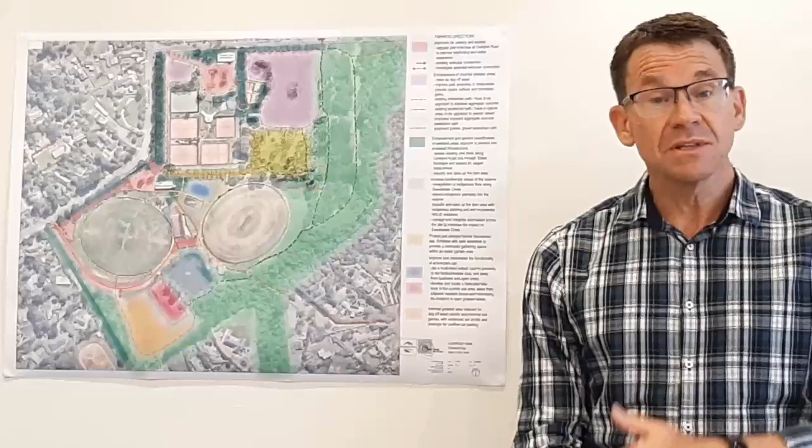The thematic directions respond to the existing conditions of the reserve and to the aspirations of the users and the community as to how they'd like to see the park in the future, what they value about the park now, and what they might like to see changed.

I'll briefly outline the thematic directions included on this plan to help you make comments on the plan on Council's website. One of the key issues at Overport Park is parking and access, particularly on busy sports days and around the main sports ovals.

The recent road and car parking works undertaken by the City of Frankston will go a long way to resolving those issues and easing car parking problems. One of the directions of the master plan will be to investigate improved access and parking along Overport Road around Oval number 1.

There's a couple of existing car parks here, and one of the directions is to investigate the potential to enlarge those car parks and to provide some connection between them to make better use of those car parks and to make circulation around the oval clearer for people.

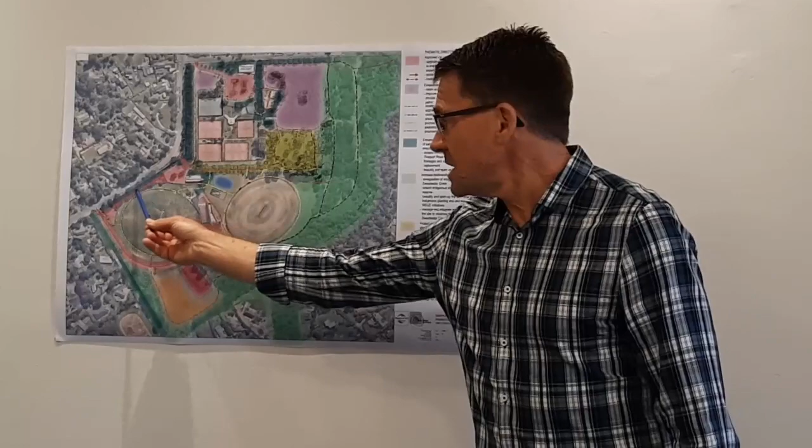That will involve some investigation into the existing pine trees along Overport Road, into their health, condition, and longevity into the future. One of the directions will be to investigate replacement of those trees with other trees that will enable improved parking and connection between those car parks.

Signage on Overport Road will also be important to direct people to the relevant car park they're coming to, depending upon what activity they're visiting at the reserve. These will be important aspects in terms of improving parking and accessibility into the reserve.

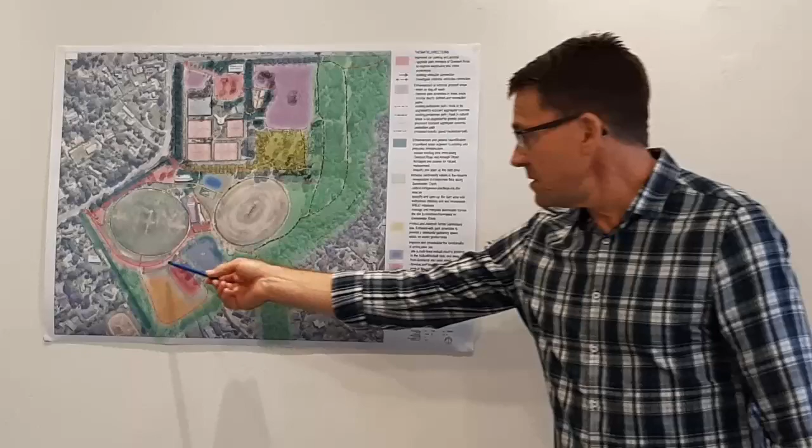Overflow parking occurs in this area down here, this open grassed area near Oval 1, on busy sports days, as users of the reserve will know. On peak days that gets used heavily for overflow parking.

The direction for the master plan is to retain the use of this area for dog off-leash walking and for informal recreation such as ball games, but also to improve the soil profile and surface of this area to enable it to cope with car parking demand on busy sports days, while retaining a well-grassed and well-drained surface for informal recreation at other times.

As well as the southern grassed area, the northern grassed area in the northeast of the park will also be retained for its dog off-leash activity and for informal recreation, just as it is at the moment.

Both of these areas, the southern grassed area and the northern grassed area, will be enhanced through a range of open space improvements such as shelters, seats, and potentially drinking fountains and dog bowls.

Importantly, both of these open lawn areas will also be enhanced through the provision of a path network, a clearly defined and connected network of paths which will connect all areas of the park with each other, not only perimeter paths around these areas, but a network connecting all activity areas within the park.

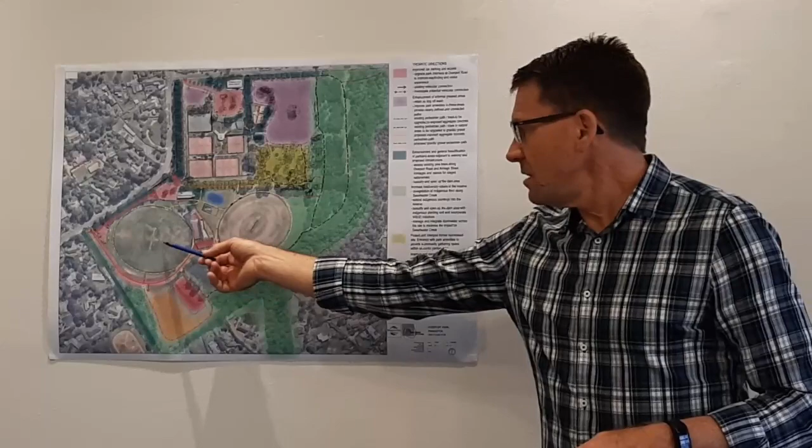The dam to the northeast of Oval 1 is intended to be improved as well. It'll be investigated whether the dam can be opened up, whether there can be structures such as decks and jetties that allow people to interact with the water body, and also some additional planting. Safety will be a key consideration in all of that.

The thematic direction is really to investigate the potential for improved activity and improved access to the dam area. I guess it's fair to say the dam is seen as an underused area that could be used more beneficially for the community that uses the park.

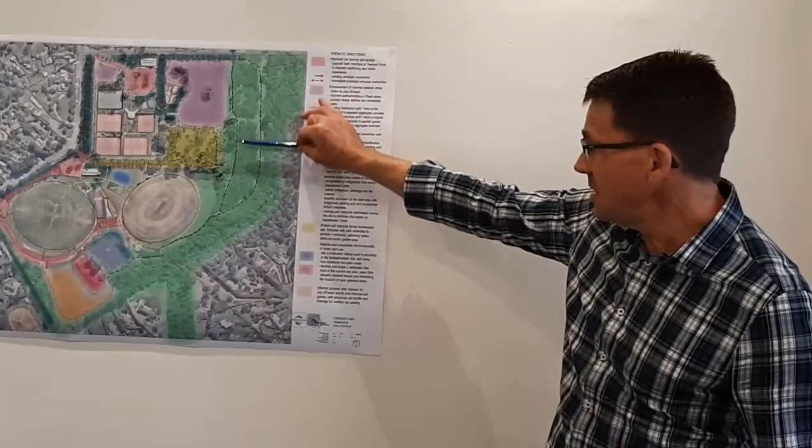Vegetation will also be an important aspect of the master plan, particularly along Sweetwater Creek, which defines the majority of the eastern boundary of Overport Park. Revegetation will have the intent of enhancing biodiversity, contributing to broader habitat corridors along Sweetwater Creek to the north and south, and providing another experience for park users, particularly those using the existing trails along the Sweetwater Creek corridor and the natural bushland areas.

The master plan is encouraging investigation into the old homestead site and trying to understand what its vegetation might have been like in its original form, treating this area as a new community space that contrasts with the areas of the park around it. This garden area contrasts greatly with the Sweetwater Creek character and with the active sports areas.

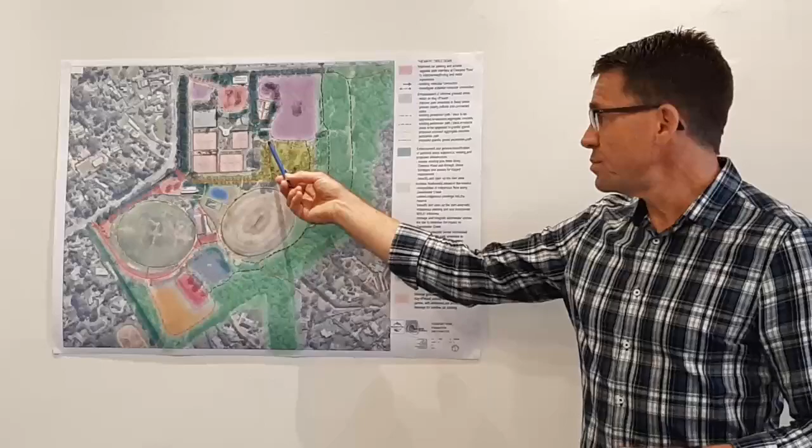So there's an opportunity to provide a new activity in this area, a place for respite, shade and comfort, with more of an exotic garden character that might reflect the old homestead character. The direction is to investigate the old homestead and return that area to a pleasure garden, something of its former character, with a mix of exotic, deciduous and evergreen trees.

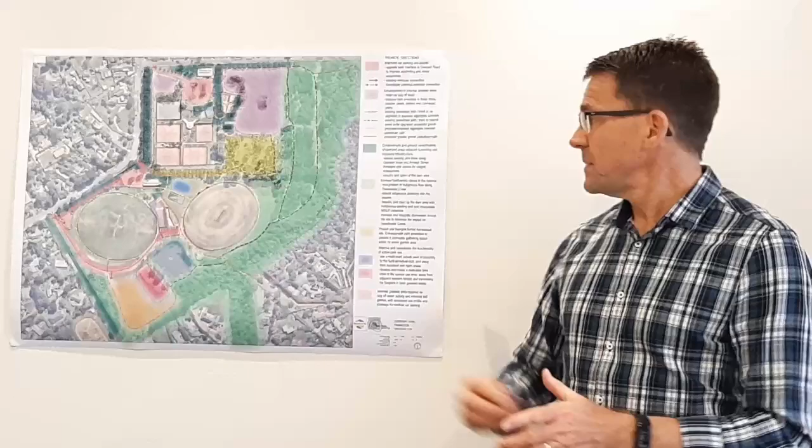In all of these passive landscape areas - the open grassed areas along Sweetwater Creek and within the old homestead garden - stormwater management will be an important direction. At the moment stormwater is largely uncontrolled as it hits the ground and runs off the site. The intent is to manage stormwater, treat it, slow its access into Sweetwater Creek, manage erosion, and provide a more sustainable future for stormwater.

In addition to these directions for the passive landscape areas of the park, the existing active sports spaces - Oval 1 and Oval 2, and the tennis complex in the north - are intended to be retained in their current form, and improved over time as part of council's ongoing management and maintenance of those areas.

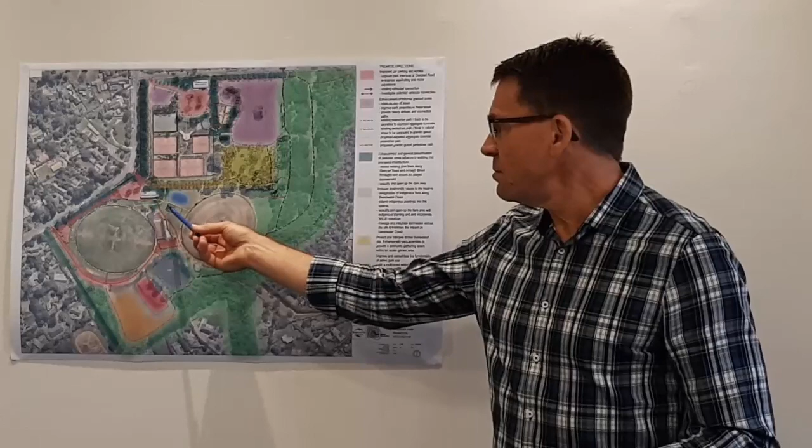But in addition to those active sports spaces, the master plan considers two new active facilities. The first is the potential for a multi-lined netball court space in the centre of the reserve, away from residential boundaries and away from the more natural and passive areas, to provide a facility suitable for the football netball club to use.

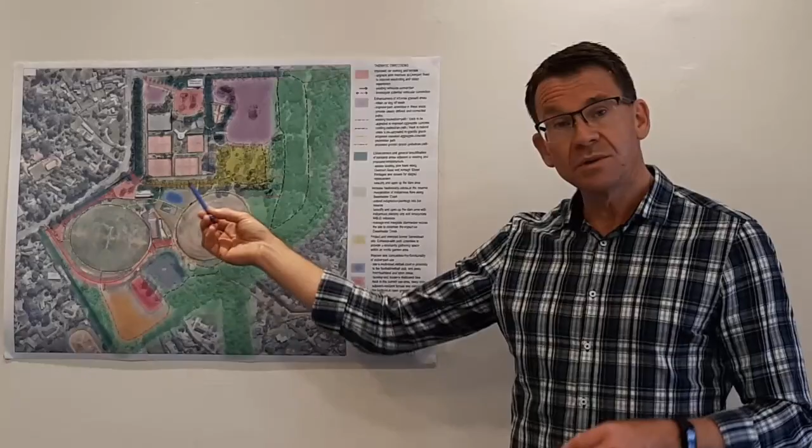At the moment we have a football netball club, but no netball facilities. So the direction is to investigate a netball court here with multi-line marking, to be used for a variety of other sports by the community when it's not being used by the football netball club itself.

The second active sports facility is to formalise the existing informal bike track near the open grassed area we've already spoken about - to formalise it into a facility that can be used by a range of users, children particularly, to learn to ride and enjoy riding their bikes, in a sustainable and manageable way with a more formalised facility.

Importantly, that facility will be located in the area it is at the moment, not extending much further into the grassed areas so we're not losing any of those grassed areas, and away from residential boundaries to avoid any interface issues.

In summary, the suggested directions for Overport Park are really to build upon the existing spaces and activities there, to enhance the existing activity that occurs, to maintain all of the user groups at the moment and provide for their needs, and to introduce a couple of new activities that support the existing clubs resident on the reserve.